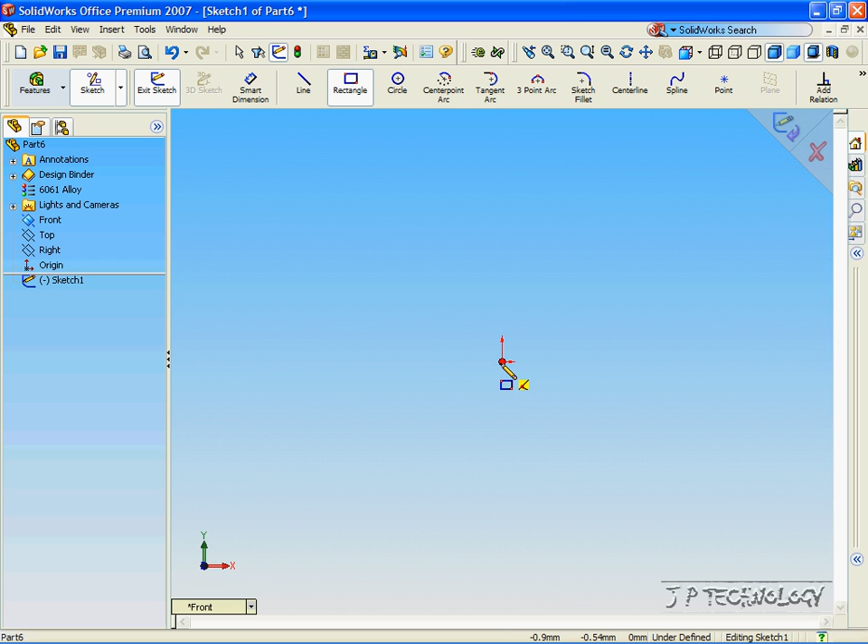So let's click Sketch, click Rectangle, click the front plane, and from the origin, let's draw a square. Now, to make this square exact, let's use the Smart Dimensioning tool, and let's make it 50 millimeters.

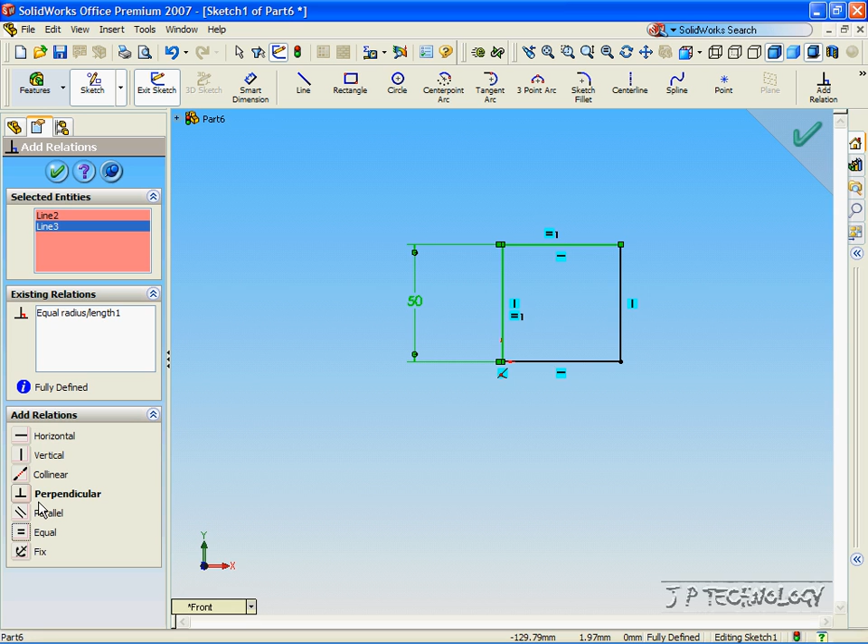With the Add Relation button, click the length that we already made, and click the perpendicular line, click Equal, and now we've made a perfect square. Click OK.

Now, to extrude the drawing, click Features, click Extruded Boss/Base, and you can see what our extrude will look like.

Now, in this tutorial, I will be covering just a few of the actual extruding options. All the different extrudes are listed below. The ones I'm going to be covering is the blind extrude, up to surface extrude, and the mid-plane extrude. The up to surface extrude is exactly the same as the up to vertex and up to body extrude, so I'm just going to show you one and you can do the rest for yourself.

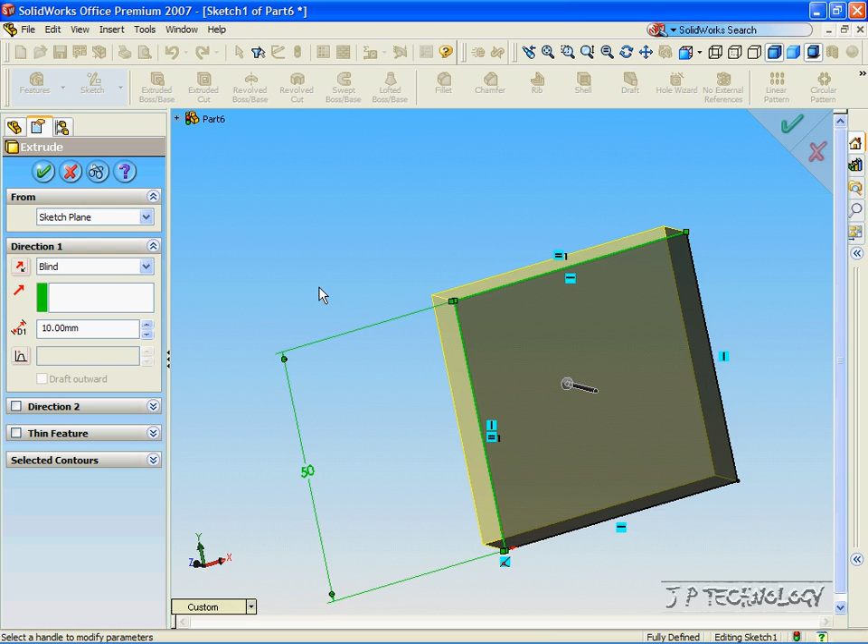Okay, so for the first one, we're just going to do the blind extrude. So click blind. For the blind extrude, it just comes out from the drawing as much as you want. Right now it's at 10 millimeters, and as you go up, it comes out more, and as you go back, it goes back more.

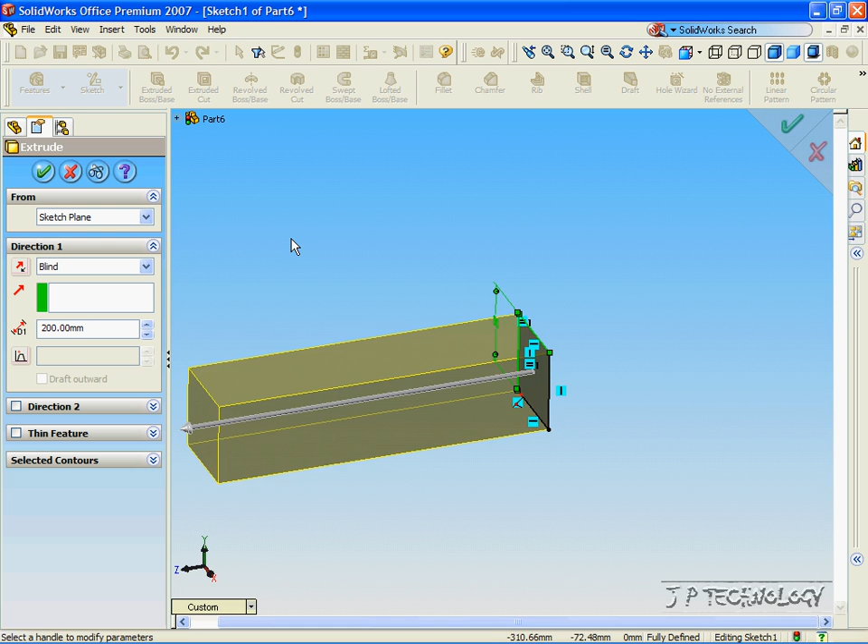So for this square, let's make it 200 millimeters. Click enter, and now you see a preview of what it will look like. Now to accept it, press the check mark, and you're done.

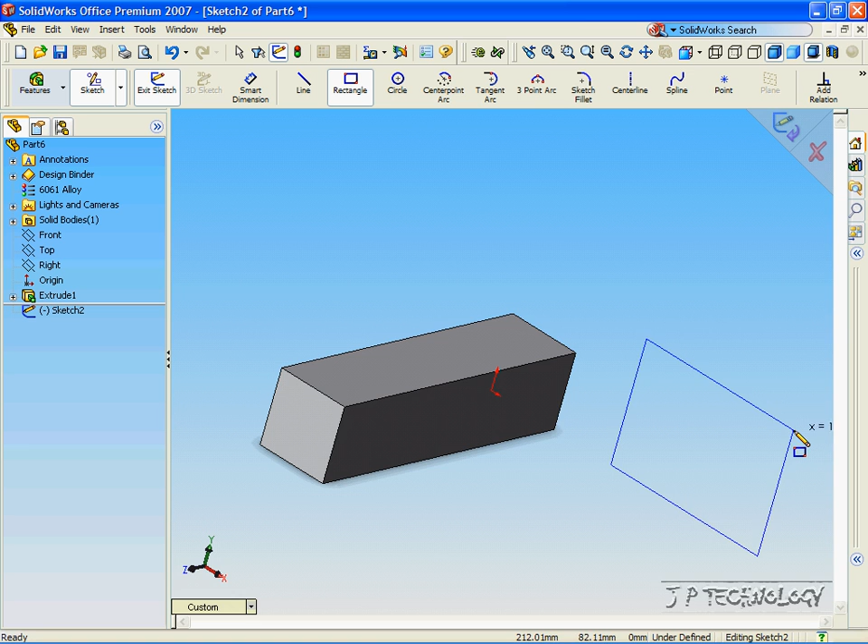Now, let's go to the front plane, and we'll draw another square right beside it. We'll go across the dotted line so it's still on the origin. And click Smart Dimension.

Let's make this square 100. We'll use the Add Relations button again. Click one length and the perpendicular length, and click Equal. Now we've made a perfect square again. Click OK.

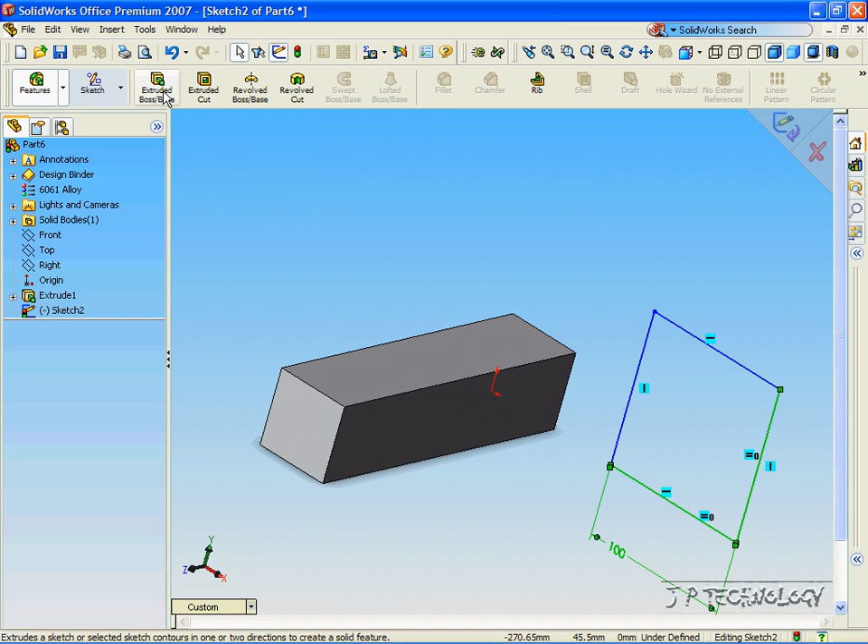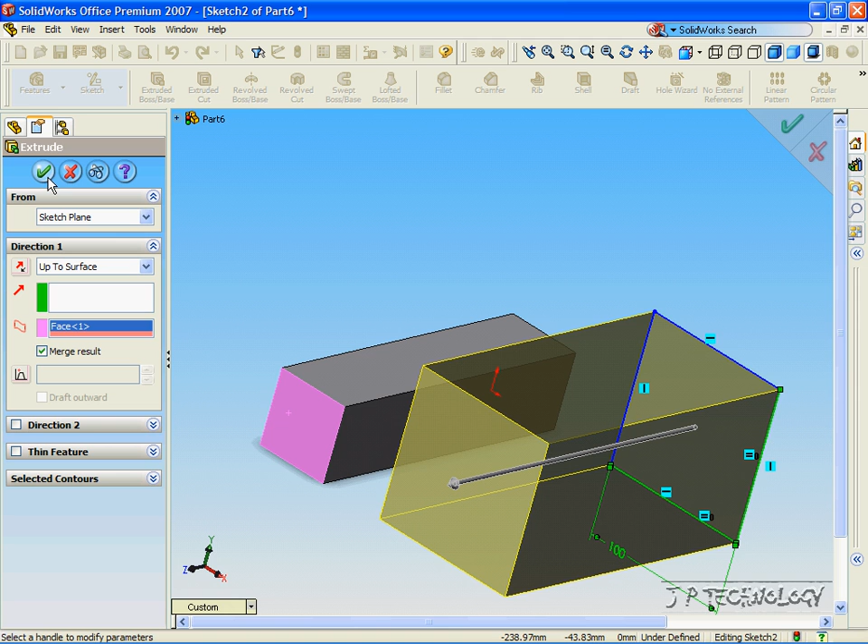Now click Features, click Extrude, and for this one we are going to extrude up to surface. All we have to do is, since we want to extrude it up to that surface, we click it, and now it shows a preview of that sketch being extruded up to that surface. Now click OK, and we have that.

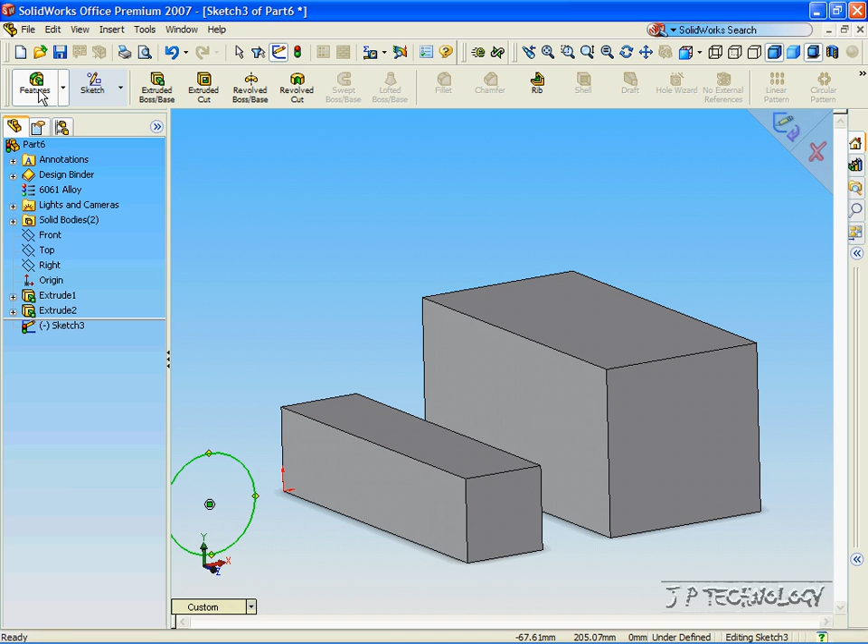Now click the front plane again, click Sketch, click Circle, and across the origin again, we'll draw a circle this time, and we'll type in 30 as the radius. Click Enter, click OK, and for this one, we're going to extrude it through the midplane.

Now, a midplane extrude starts off at the green circle, and it goes out equally on both sides. It's like the blind extrude, just that it goes halfway out one way and halfway out the other way. As you can see, as we increase it, both sides increase, and as we decrease it, both sides decrease.

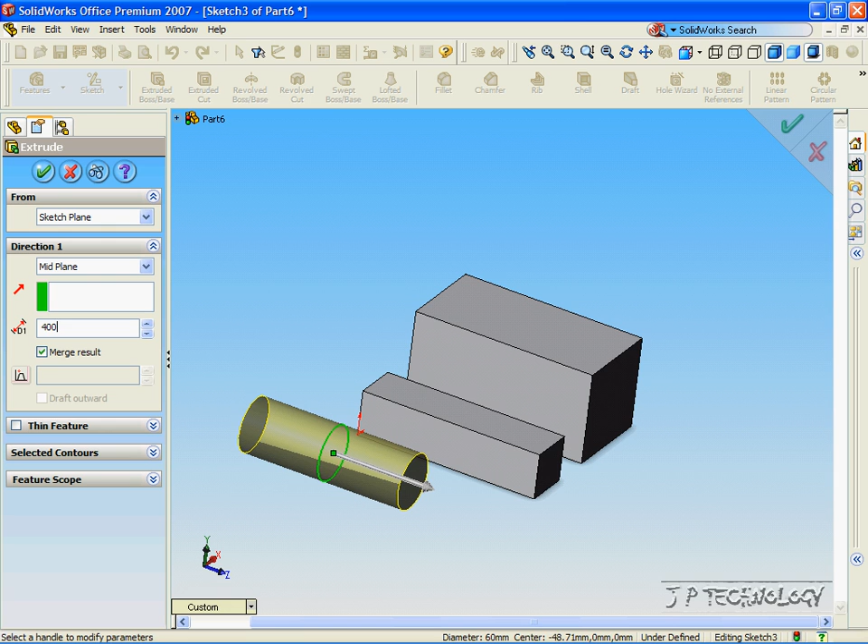For this one, let's make it 400. Click Enter, click OK, and now we've extruded through the midplane. And that does it for the extruding tutorial.